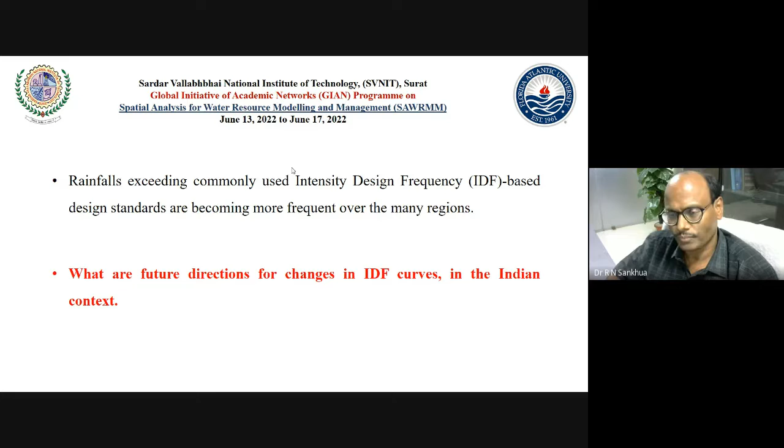Thank you, sir. I would like to invite Dr. Dhruvesh Patel, sir, to fill up on this particular point. Dhruvesh sir, are you able to hear me? Yes. So are we discussing this particular point, or am I moving to flood assessment? I did not hear your question. Sir, I wanted to have your opinion on this point.

Okay, rainfall exceeding commonly used intensity-duration-frequency based design standards becoming more frequent over many regions, the future direction for change in the Indian context. Yes, I am in favor that we have to change that, from my experience in dam break analysis and all. I have seen that we will not have adequate IDF for flood assessment. So in that prospect, I would suggest that yes, we have to revise.

Thank you, sir. Ms. Aarti has raised her hand. Ma'am, you can unmute and speak up. Good evening to all the experts. Myself Aarti from SSNL Surat.

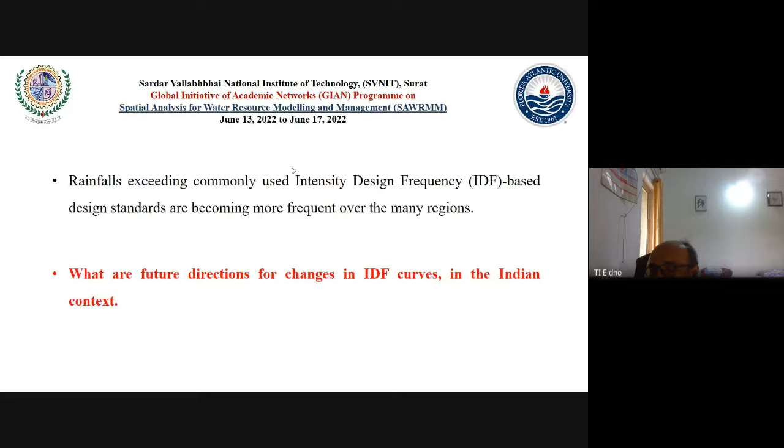Vipin? Hello. Yes, sir. I think sir has lost connection. Yes, sir. So if any other expert has to say anything about this point. All right. So thank you, everyone. We'll move on to the next point now.

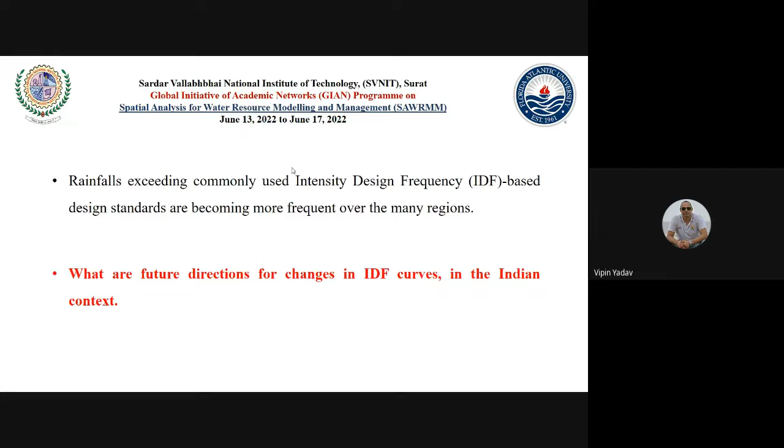Precipitation extremes. On this last question that the lady asked, I would like to say that don't go for basin wise, because basin wise the data will be more erroneous, because the basin is quite big. The 20 basins you see in India are too large in size. So if you take sub basin wise, it's okay. Otherwise, if you are going for city size, it's okay also, no problem.

But don't go for bigger sizes, because taking the data for those bigger basins would be difficult for you to handle, and also the uncertainties will be much more. So better attack these areas which are smaller in size, either sub basins or watersheds or city areas, whichever you feel better. Thank you, sir.

Thank you, Dr. sir. So now the next point is precipitation extremes, both in terms of magnitude and frequency, that contribute to catastrophic floods are evaluated by many studies around the world to understand the influence of climate change and variability on these events. How is climate variability driving the nature and magnitude of floods and their impact in India?

So I would request Dr. Mukesh Joshi to share his experience at SSNL. I request Vipin sir or Rashmi to show his slides on what happened during the last Narmada flood. Dr. Vipin sir or Rashmi, please share Dr. Mukesh Joshi's presentation. Okay, sir. This is a very good example, exactly how it happened in the case of Narmada, that Dr. Joshi is going to explain to us.

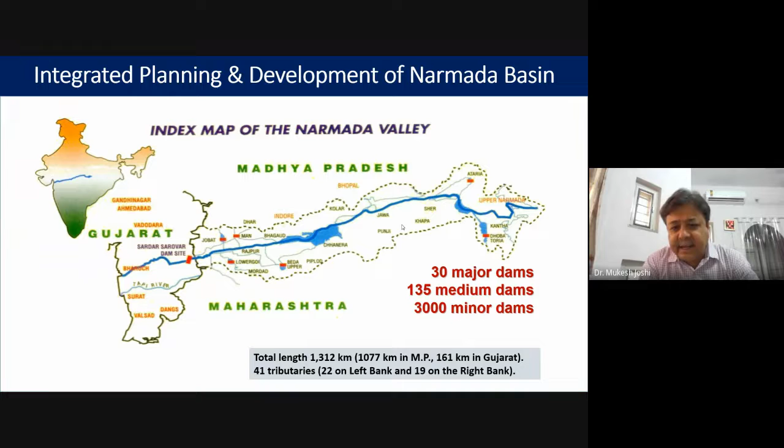When the integrated planning and development of the Narmada Basin was conceptualized, it was envisaged that 30 major dams, 135 medium dams, and about 3,000 minor dams would be constructed in this basin on the river Narmada and its tributaries. So far, about 14 major dams have been constructed, and we will talk about it in the next slide. Next, please.

These are the major dams which were envisaged, and out of those, 4 major ones we can talk about right now are the Indira Sagar project or Narmada Sagar project, the Omkareshwar project, Maheshwar, and the Sardar Sarovar project. The Sardar Sarovar project on the river Narmada is the terminal dam so far as flood control and flood management is concerned. Next, please.

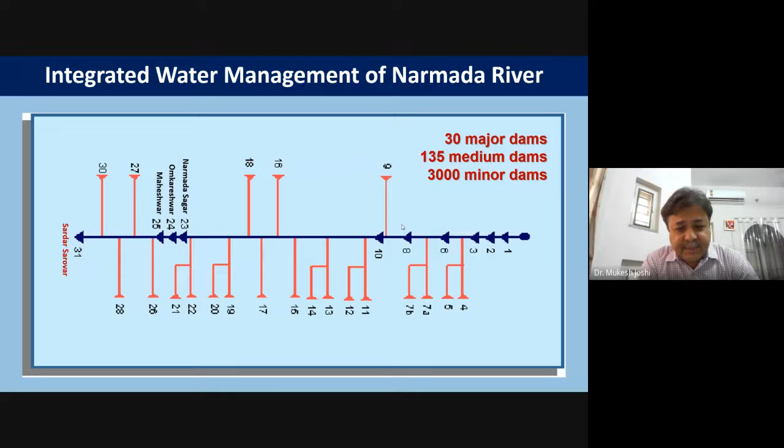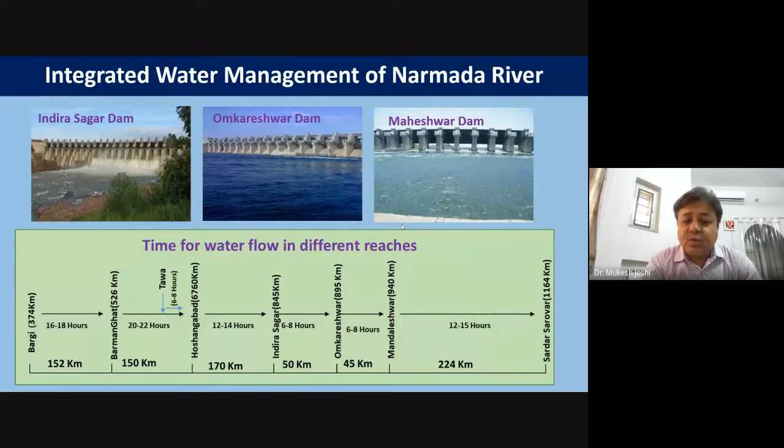So the N-1 dam, which is called Maheshwar, is about 224 kilometers away, and Indira Sagar, which is even larger than the Sardar Sarovar project in terms of its live storage capacity, is at around 320 kilometers. Next, please.

Now, here I have tried to present the live storage capacity of these 4 major dams which we are talking about. Bargi on the right hand side, that is the upstream-most, and then Tawa, Indira Sagar and Sardar Sarovar. So Sardar Sarovar, if we see, the live storage capacity is 5,760 million cubic meters of water, which is around 50% of its annual water requirement. So the storage capacity is not huge here. Indira Sagar, as compared to that, has 9,745 million cubic meters of live storage capacity.

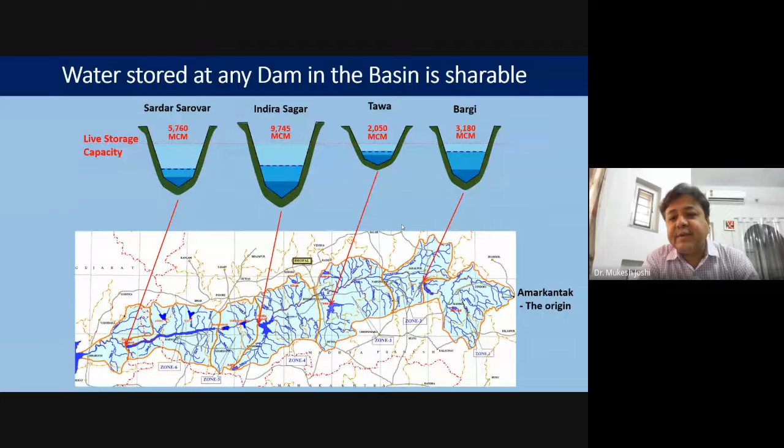So the point which I am trying to drive here is that to address the climate variability and the floods occurring because of that, we need to operate these reservoirs in an integrated manner so that the flood effects in the downstream can be minimized and the water wastage can be reduced to the extent possible. Next, please.

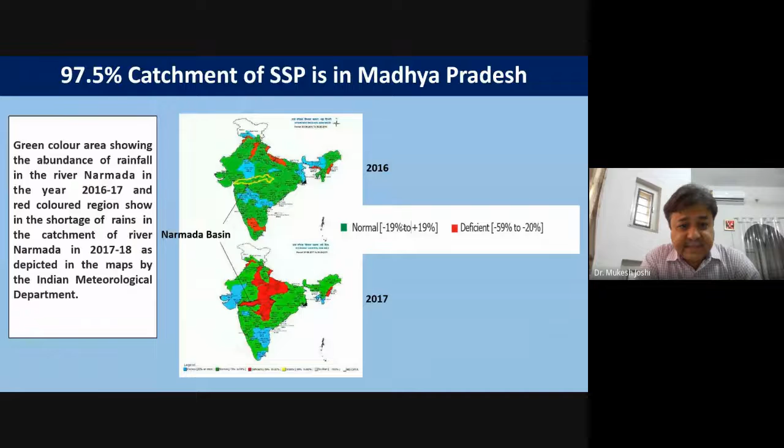Downstream effects are to be minimized because downstream of Sardar Sarovar Dam there is a major city, Bharuch, having about 3 lakh population. And then there are tributaries also meeting the main river downstream. So we need to operate the Sardar Sarovar project spillway gates in such a way that the overall impact downstream is well within control, because that will be further added up with the tributary flows like Karjan and Orsang. Next, please.

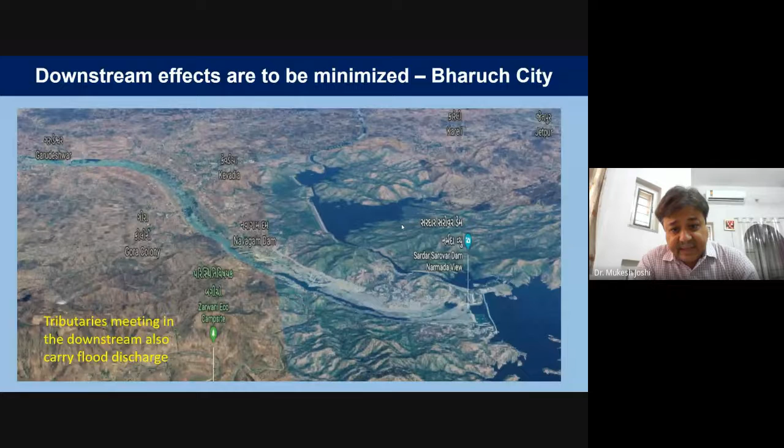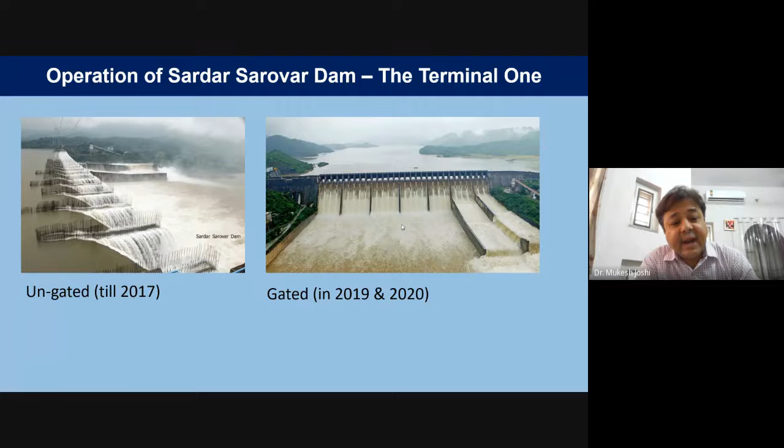Key issues and approaches that we have adopted. The first and important one is defining rule levels for all major dams in the basin. And pre-depletion may also be required in some cases. This pre-depletion may help hydropower generation, because, for example, Indira Sagar project has huge hydropower infrastructure, and Sardar Sarovar project has a 1200 megawatt riverbed powerhouse plus a 250 megawatt canal head powerhouse. So we can use these 2 powerhouses, generate hydropower, and pre-deplete the dams in consonance with the flood forecasts or rainfall forecasts available, particularly with the help of climate variability models.

Implementation of a real-time data acquisition system, which we have implemented with the help of the Narmada Control Authority and Central Water Commission. Then synchronization with hydropower generation, which I have talked about. And the bottom line here is water is an immensely precious commodity and need not be allowed to go waste. Next, please.

So with this, I would like to thank the organizers as well as all the participants, and underscore the point that under climate change conditions, we need to evolve our own strategies and models to help integrate the operation of the reservoirs.

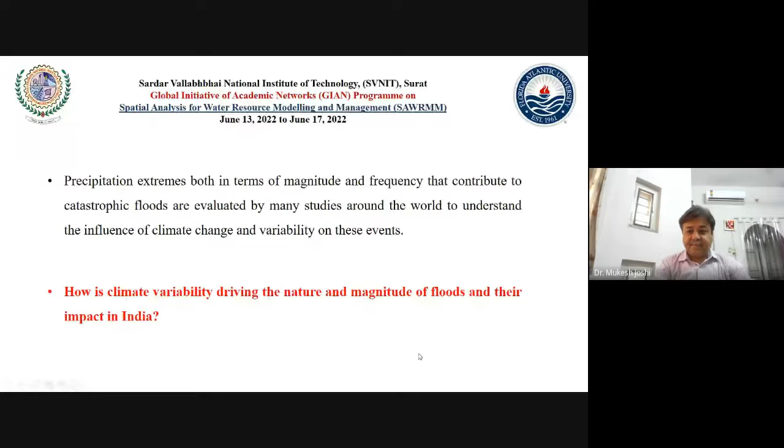I would like to invite views on the point we have been discussing. So if any expert wants to say anything on this particular point, you are welcome, please.

So on this point, I would like to just tell a few things. Whether the extreme precipitation changes have a relation with the seasonal cycle for water availability is not clear as yet. We are getting papers, we are getting research from IITs, IISc or some other organizations from outside also. But we are not able to explain the things beyond that.

But the projected precipitation and temperature changes imply possible changes in floods, although there is low confidence in projections of the changes in floods. Look at that. Confidence is also low due to limited evidence, and because the causes of the regional changes are complex, which are also difficult to understand. So there are also a few exceptions to the statement, but still we get that sort of problems here.

Since many extreme events, such as those associated with precipitation, occur at small temporal and spatial scales, the climate simulation skill is currently limited and local conditions are highly variable. So projections of future changes cannot always be made with a high level of confidence because of the data which we are getting from academic institutions, research institutions and others.

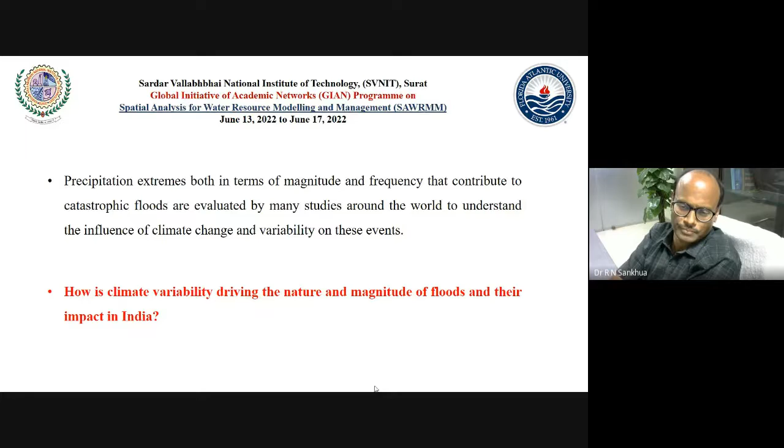We now move on to the next point. Are there any research studies undertaken in India to understand snow runoff generation mechanisms and rain-on-snow conditions that lead to catastrophic floods? I think we have already covered this topic in the lecture of Dr. S.K. Jain. So I would like to invite Jain sir to open the comments on this point.

Yes, Mr. Yadav, we are doing a number of studies on snowmelt runoff. As you know, temperature is the major cause of snowmelt, and we take snowmelt from April onwards. In addition to temperature, we have also included rain falling and transferring heat to the snow, causing rain melt. We consider that in computing snowmelt. But we have not carried out any study showing that rain melt caused any kind of flood.

But as we saw in the Kedarnath event in 2013, there was heavy rainfall during those 2 days, on the 16th and 17th, and today is the 16th. So 9 years back, heavy rainfall occurred, and because of that there was some kind of snow avalanche. That snow fell into Chorabari Lake, and there was flooding. But it was mainly because of the breaching of that lake.

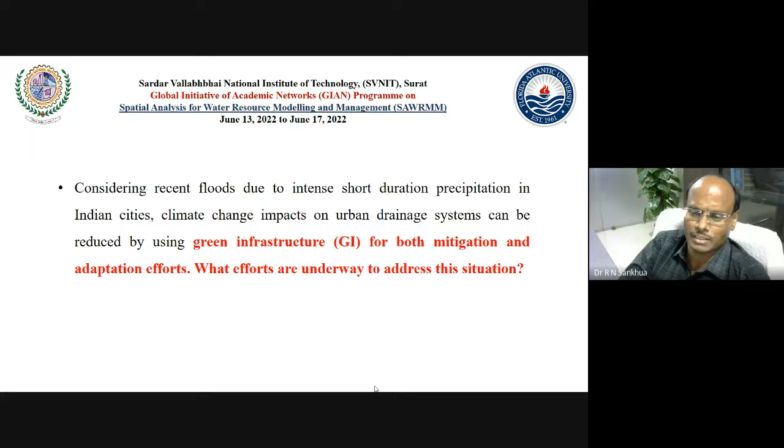So 6 months back, we had a meeting with the commissioner of the Bangalore Municipal Corporation and discussed this, and I was invited also by GHMC Hyderabad. There is not much data on this, and no information effectively available in Hyderabad or Bangalore. But still GHMC and BBMP are trying their best to have these GIs implemented, and they depend on the people's views.

Thank you, Sankhua sir. Maybe we can have the view from Dr. T about this from his perspective.

I think green infrastructure and other adaptation methods are going on in different US cities. Even there, there's resistance. Also, in many cities the zoning laws have been violated, so people constructed in places where they are not supposed to because of business interests. So they are generating this concept of livable cities, which attaches to transportation, infrastructure, and water. They're trying to buy land in heavily urbanized, populated areas and then create green infrastructure so that you can store the water temporarily and at the same time infiltrate it faster.

So Pittsburgh is one of the examples where they have achieved some success, and this is being continued in different cities. So we are moving towards improving that so we can reduce the effect of flash floods in many US cities, which are a common occurrence these days.

Thank you, sir. So definitely a way ahead to tackle the situations in a more resourceful way. We'll now move on to the next topic. Approaches that consider incorporation of GI for stormwater management, performance evaluation of existing urban drain systems, and adoption of emerging technologies to assist low impact development are required. How are Indian cities making headway in improving forecasting systems, urban stormwater drainage networks, and other initiatives to address floods in an evolving climate?

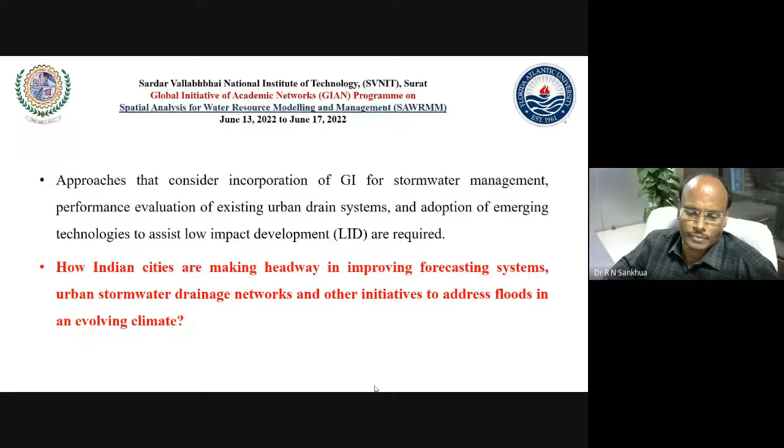Yeah, sir. In fact, though a lot of studies have been carried out in India, especially in the aftermath of the Bangalore, Chennai, Mumbai and Delhi floods, the implementation of the stormwater drainage system is lacking, and the maintenance of the stormwater system also is lacking. In India, the number of rainy days is only about 60 to 70 days in a year. The remaining 300 days, we don't have rainfall.

So all the drains are filled with garbage, and when it actually starts raining in June, July, there is no capacity in the drain, though the drains have been designed taking all these details into account. So the operation and maintenance of the drainage system is what is lacking. Even now, you find short duration high intensity rainfall causes floods; even though they've got excellent roads, the drainage system is bad.

So, what we do in a city like Warangal, where I live, we request the municipal commission, in fact, at our NIT Warangal, we write to them to get all the drains cleaned in the month of April, May; we do it on a war footing. So this is one of the cities where it has not been flooded. So construction is one aspect, design is one aspect, but the bigger problem is the operation and maintenance of the drains.

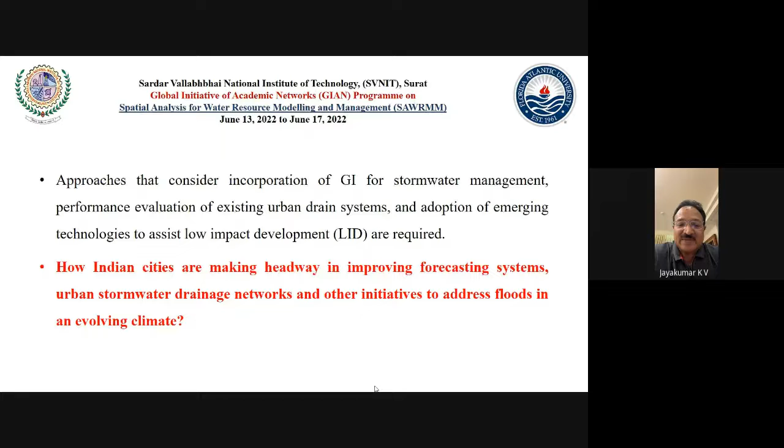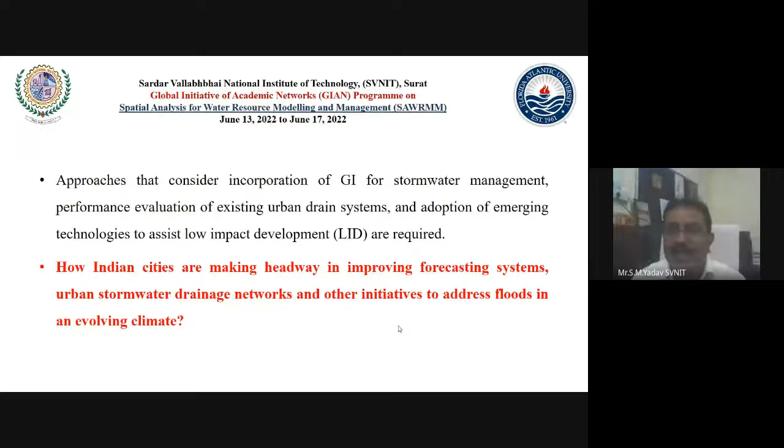Yeah, Dr. Yadav. Yes, sir. So that is rightly pointed out, and therefore, as Professor Joshi will agree with me, most of the major cities of Gujarat take up pre-monsoon activity. And under the pre-monsoon activity, mostly they try to clean the stormwater drains, so that they are ready to receive the runoff from the roads.

Yes, Vipin, shall we move ahead to the next point? Yes, sir. Thank you, sir. So most of the topics under challenges faced by researchers and practitioners in India have been extensively discussed in the foregoing discussion. So we'll move on to the next point and quickly move forward.

So some of the points mentioned by Dr. Dhruvesh Patel, I'll just read out the highlighted points, the problems he has faced, and I would request Dr. Dhruvesh, sir, if I miss any point, he can add on. Sure. Thank you so much. First, I would like to thank Professor Yadav for organizing such an important STTP for the researchers, professors, and all stakeholders,

where we have seen that the major parts cover hydrology, hydrodynamic and hydraulic modeling. I have been working especially on flood modeling only. And I have observed some important points from the research required to do efficient research in flood assessment and management. So the first and foremost point I have observed is that for any hydrologic and hydrodynamic modeling, we require a high resolution DEM.

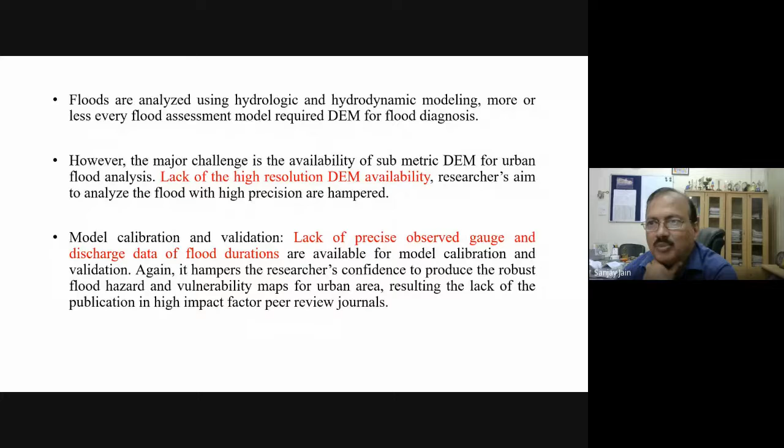Yes, this is really very important, and I came to know it from you. Thank you so much, sir, that LiDAR techniques are now going to be implemented in India, covering some parts. Most likely those DEMs will be available in the public domain. Once they are open source DEMs. Open source, yes. Thank you so much, sir.

So the next point I would like to discuss is the major constraint of model calibration and validation. In most cases, hydrologic or hydrodynamic models are validated and calibrated with the help of observed gauge discharge data. Scanty data sets are available for our rivers, and because of this, it hampers our ability to validate our models and produce robust results for flood hazard and flood vulnerability mapping.

So what can we do in this case to get precise observed gauge discharge data? As Dr. Jain mentioned, under HP, India WRIS is now one of the mediums to disseminate the data that the Central Water Commission and the various states are observing. Right now, for the unclassified basins, except Ganga and Brahmaputra, the data are available from India WRIS. One can download the data. Most researchers download gauge and discharge data from those sites and utilize it for research purposes, MTech and PhD uses.

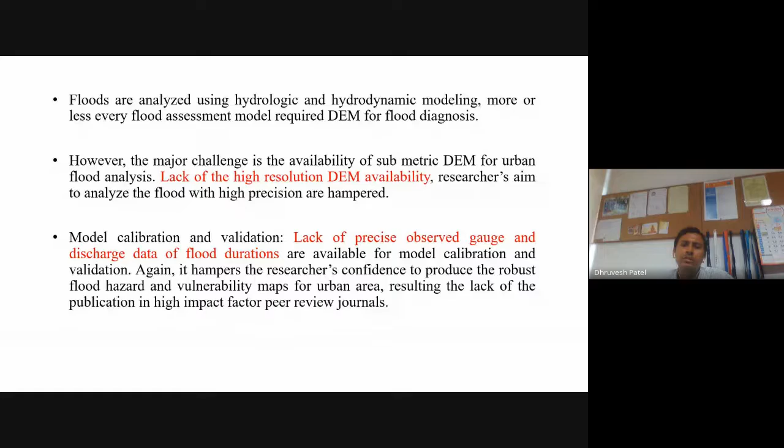Sir, these data are mostly from the Central Water Commission, and India WRIS is the site. But the problem here in India is that data is available for a 20 square kilometer area only, free of cost for research purposes. Once the subbasin becomes bigger, it becomes difficult for researchers to get the data. These sorts of problems were faced earlier and they are facing the same problems now. This was discussed in the Ministry of Jal Shakti maybe 1.5 years back, but it was not accepted, and the same problem persists.

The data validation part of the Central Water Commission is not that up to date because of shortage of manpower and technical personnel, so they are not able to do all of it. The water year book is published every year, but we still have data validation problems in the southern part, I am talking about Godavari, Krishna, Kaveri, Penna, all those rivers. Particularly the secondary validation by the Central Water Commission is still lacking because there is not the requisite level of personnel involved. And WRIS does not give data for more than 20 square kilometers, as I said.

Another thing I would like to say: like Dr. Lwani said regarding Ganga, Brahmaputra and Indus, these data are available, but it is time consuming, 4 to 5 months, through the ministry and the commissioner, such as the Commissioner Ganga. The regional chief engineers are in charge of this data and they can give it to researchers provided the data is not classified. The G&D data can be available from the site offices, and the CWC surface water data center maintained at CSMRS has the data, available on payment of some amount for particular sites.

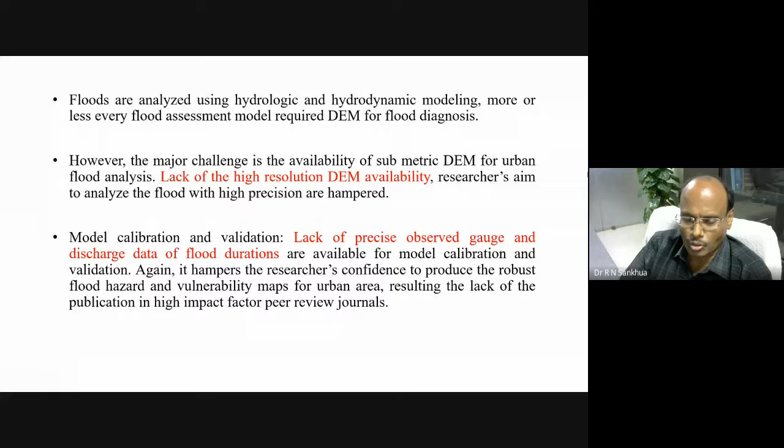For other data sets, you can approach the regional offices, and the executive engineer or director in charge can release data with permission of the chief concerned. So G&D data is available. The only thing is classified data takes time because it goes to the ministry and the concerned commissioner approves it. Otherwise, data sets are available, even within one day. Recently, 3-4 days back, I got 20 years of data within one hour. Up to 2021 we got validated data, but after 2022 we did not, because running SWDES, HYMOS and settling data is a heavy task and the personnel are very few in number.

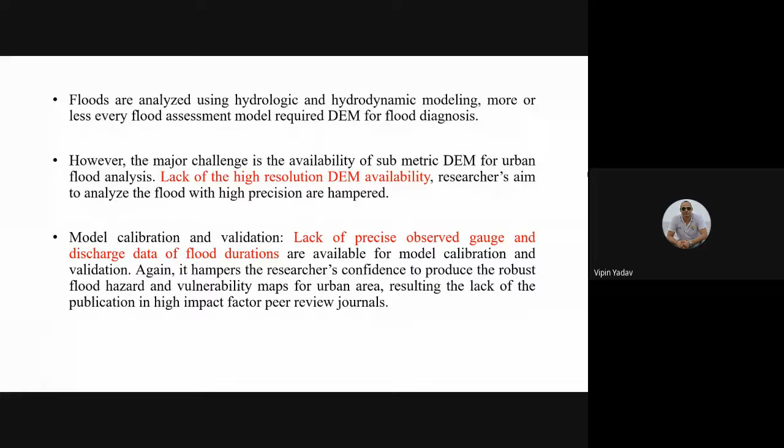For the benefit of running out of time, I would like to move on to the next point. Dhruvesh sir? Yes, please.

Sometimes it is difficult for researchers to get the data from the government offices. And because of the hampering in receiving those data, they cannot produce quick flooding or flood analysis. So what can we do in this case, how can we quickly get the data sets available?

See, in this case, I would like to pinpoint that this nail is not hammered at the proper place. Right? That causes the delay. If you approach one junior engineer or assistant engineer or engineer, they cannot give the data to you. The data should be requested with proper format and everything should be in place. That should be sent in email to the concerned officer who is in charge of that.

For example, I'm talking about Godavari, Krishna, it is sent to KGBO, Hyderabad, or for Mahanadi, Eastern Rivers. What we are seeing is that many data requests are coming to me, which I am not in charge of, but still they come to me because they think I am in charge. So the proper nail should be hammered at the proper place. Only then can you get the data instantly.

And I tell you that whatever data is available can be disseminated within one day's time, not much more than one day, because the data sets are available in the computer, in Excel format, and you need to request the person who is in charge of the data, and you will definitely get the data in time. Sometimes it gets delayed because the request is made to another person who does not possess the data. So that becomes a problem.